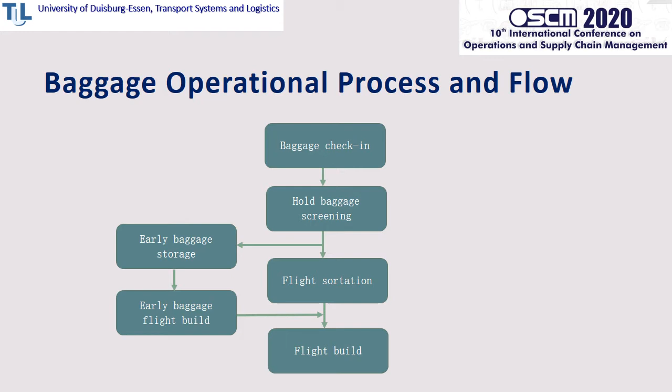For wide-body aircraft, there are specific containers called unit load devices. Wide-body aircraft are such as the A330 and the A380. In the flight build is where our design comes into play. The proposed automated unit load devices will replace the old ULDs.

The new automated ULDs would have omnidirectional conveyors built within them. And within it are 3 layers of such a conveyor that is capable of elevating in the vertical direction in order to load the baggage within it.

However, a downside in this design is that with the built-in conveyors, less baggage can be loaded into the ULDs. A standard LD3 unit load device can usually have a capacity of about 40 pieces. However, with the added conveyor, it's expected to drop to an estimated 32 pieces only.

To further automate our system, we are introducing the use of an automated tug. It is basically an automated guided vehicle, so it's manless and is able to direct itself based on connection with the central computer, which tells it where it has to go and where it has to deliver baggage to. Within the automated tug is also the power supply that supplies the automated ULDs.

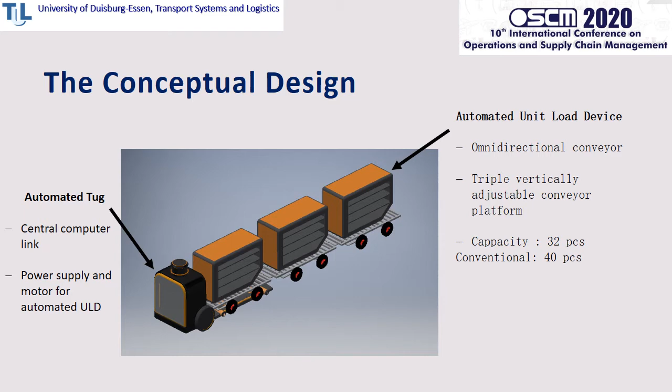Moving on to the research methodology. We first start off with the literature review, and then we move on to case studies, and then we run a simulation to test our design against the conventional manual, and finally we do a cost analysis to see how economically viable this design is.

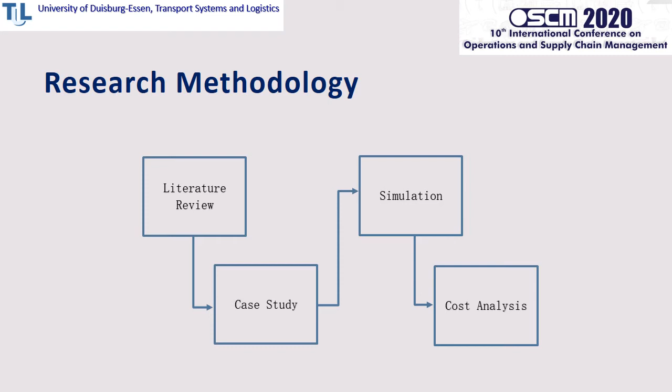In our literature review, it was found there was no notable research conducted in this area until the past 15 years or so. Among the earliest research we could find was done by Richardson Bridge and Otius in 2007, titled New Developments in Airport Baggage Handling Systems, where they proposed a baggage crane to replace the baggage cart in the loading of narrow-bodied aircraft.

Furthermore, the next research we found was done by Alexandra Bradley in 2013, titled A Comparison of Whole Life Cycle Cost of Robotic, Semi-Automated and Manual-Built Airport Baggage Handling Systems, where they discuss the benefits of an automated system. And it was found that an automated system for a major airport is hugely beneficial.

Further on, Bryce et al. wrote in 2015 a newly designed baggage transfer system implemented using events-based simulations, where they conducted simulations in order to test a baggage transfer system not for airports but delivery of baggage for other means of transportation like trains and so on.

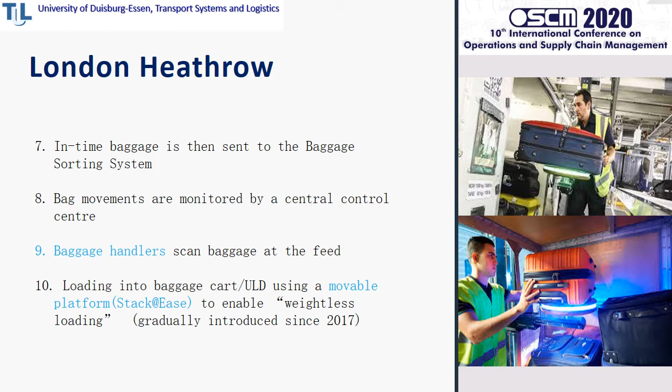Our next case study is on Amsterdam Airport Schiphol. It was voted the best airport in Europe for the year 2019 and is the second busiest airport in Europe in terms of air traffic. The flight building of baggage in Amsterdam Airport Schiphol uses what is called a coordinator assignment system, which means a coordinator is an experienced worker who delegates teams and resources to each station in order to load the ULDs. And all the loading of the baggages is done by hand manually.

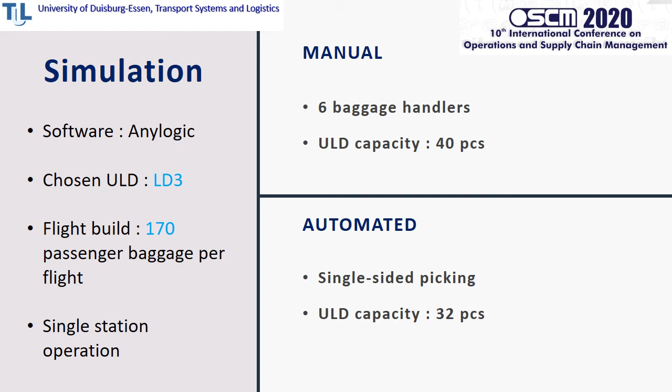So here we can see that one of the world's best airports still relies on traditional manual labor in the loading of baggages into ULDs. Moving on to the simulation. For the simulation, we simulate the building of 170 baggages. For the manual, 6 baggage handlers are assigned and 40 pieces is the capacity of the ULD. And for the automated, we only use a single-sided picking and the ULD capacity is 32 pieces.

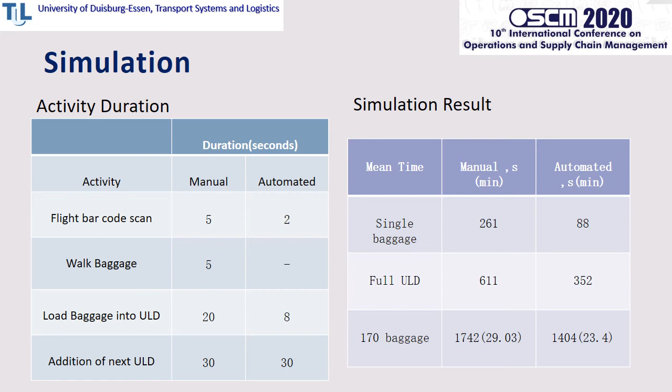The duration for each activity for the simulation is as shown here in the table. And on the other side, we have the simulation results. The mean time to load a single baggage is shown, and the mean time to fully load a ULD. Take note that the manual has a capacity of 40 and the automated a capacity of 32, hence the large gap. For 170 baggages to be fully loaded, the mean time taken for the manual is 29 minutes, and for the proposed design it took 23 minutes, almost a full 6 minutes difference.

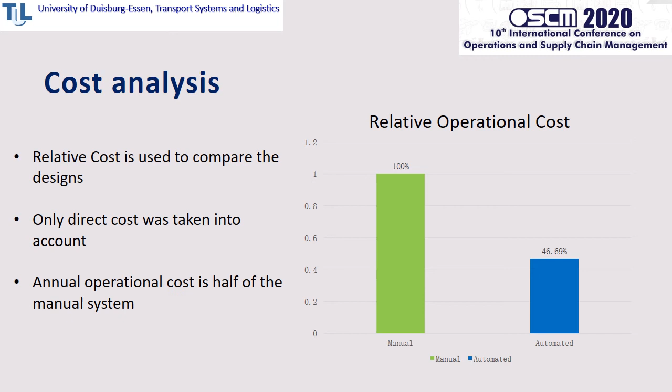Moving on to the cost analysis. Relative cost is used to compare both designs. And take note that only direct cost is taken into account. Indirect costs were not taken into account. It is found that the operation cost of the proposed design is about half of that of the current manual design. And it was found that it takes about 2.2 years to get a return on investment to break even. And after that, we should see savings from the use of the automated design.

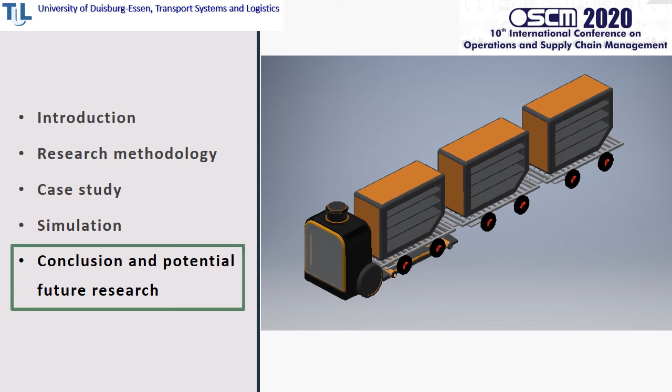Now to the conclusion and potential future research. In conclusion, this research area is relatively new. It's only been around for about 15 to 16 years. Many major airports, such as the Amsterdam Airport Schiphol, have not fully adopted technology into this section, although they do have a highly advanced and modern baggage handling system at the front. The proposed design is capable of loading ULDs up to about 19.3% faster than the conventional manual. And the cost of switching to the proposed design could be recovered after about 2.2 years.

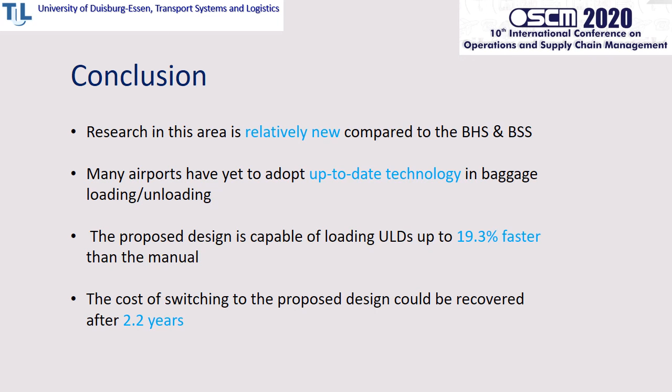In potential future research, we encourage the investigation of using the same equipment to help in the loading of baggage in narrow-body aircraft. We would also encourage further research in the parking of aircraft, where currently the tugs which are being replaced by the design are used also in the parking of aircraft.

Furthermore, the design proposed only addresses the issue of loading baggages into the ULD, but it does not address the issue of loading the ULDs into the aircraft body itself, which still requires manual labor. Perhaps airlines and airport operators could collaborate to further fund more research in this area, as the state-of-the-art system would benefit them the most.